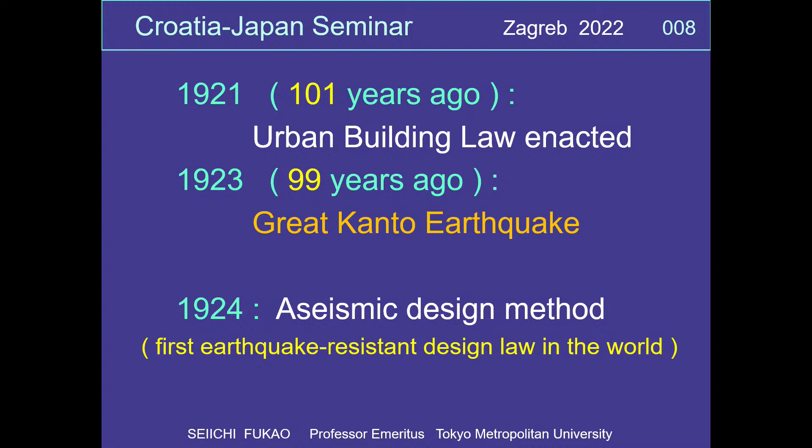In those days, the building height was restricted to 31 meters at maximum. I assume people worried about the risk of earthquakes and fire on high-rise buildings. As a matter of fact, the 5-storied pagoda of Toji Temple, built in 1644, is 54.8 meters tall and still standing solid. Wooden structures are pretty strong against earthquakes.

This 31-meter height limit was in place till 1970, about 50 years ago. A major shift in the approach to structural calculations terminated the restriction. But even before 1970, skyscrapers started to show up in Japan, taking advantage of a special permit system. Today, we use different seismic design methods between buildings 60 meters or higher and lower than 60 meters.

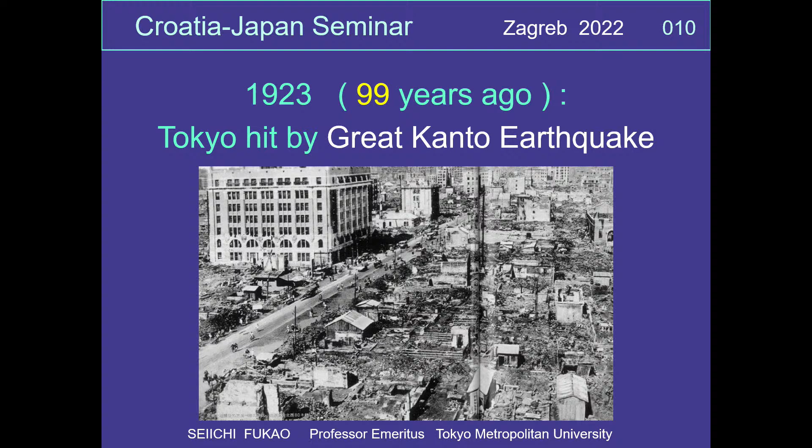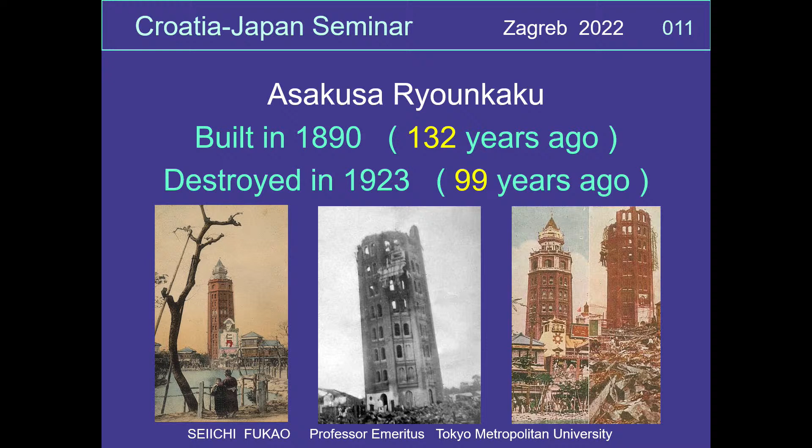The Great Kanto earthquake destroyed this building called Ryōunkaku, which had been built as a scenic viewing tower in a downtown area called Asakusa in Tokyo. It was a 12-story brick building, 52 meters tall, and completed back in 1890.

Right after the Great Kanto earthquake, an organization for recovery efforts was created called Teito Fukko-in, or Imperial Capital Reconstruction Institute, headed by Shinpei Goto. Mr. Goto had been the governor of Tokyo and was the minister of the interior at that time.

In 1924, a year after the quake, the Ministry of the Interior founded an organization called Dojunkai, which constructed multi-residential buildings from 1925 to 1934. The construction of wooden houses continued on at the same time.

From 1925, the same year, elementary schools were reconstructed using reinforced concrete, amounting to 117 schools in total.

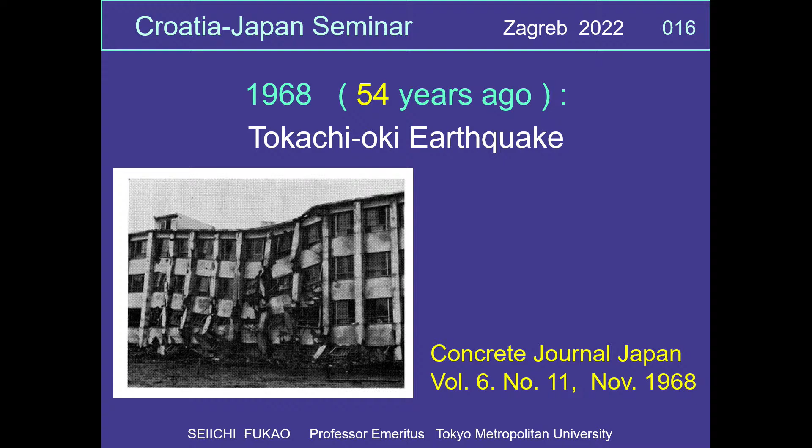In 1968, there was the Tokachi-oki earthquake of reportedly magnitude 7.9. Post and beam RC school and university buildings received significant damage in southern Hokkaido and the Tohoku regions. It sent a shockwave through the discipline of structural engineering and initiated a broad range of new studies.

In 1971, the Enforcement Order of the Building Standard Act was amended. Enforcement orders belong to their governing laws, and the order prescribes special design methods and other requirements under the BSA, Building Standard Act. In addition, the Architectural Institute of Japan, or AIJ, revised its RC structural calculation standard. The AIJ is an organization of Japanese researchers in architecture with approximately 36,000 members, including structural engineers, designers, and architects.

Our seismic design methods and seismic resistance standards have evolved thanks to our experience of earthquakes and their impact, scientific and engineering studies, and actual construction. Buildings do last for a long time, and the vulnerability of old buildings constructed under outdated building codes became a matter of concern. Thus, in 1977, the standard for seismic evaluation of existing buildings and guidelines was introduced.

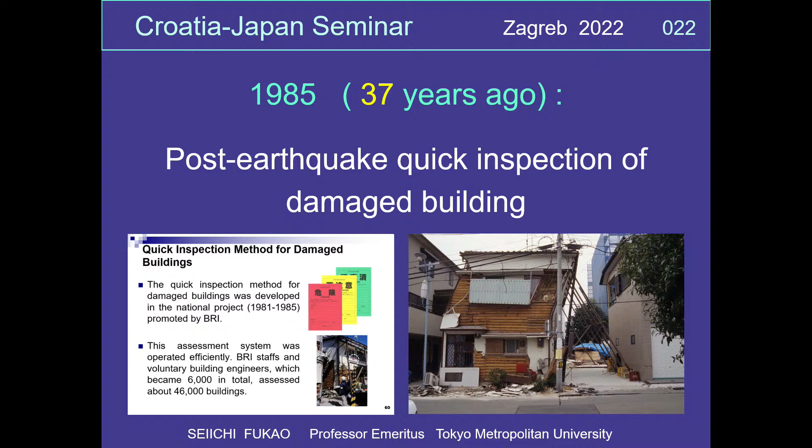In 1985, the Building Research Institute, under the Ministry of Construction, led the development of the post-earthquake quick inspection of damaged buildings, a new technology and program where buildings are surveyed for damage right after an earthquake. Assessment is made of whether the building is damaged to the extent it is hazardous and should be off-limits, or if it is safe even if showing some visible damage, and the building will be marked accordingly.

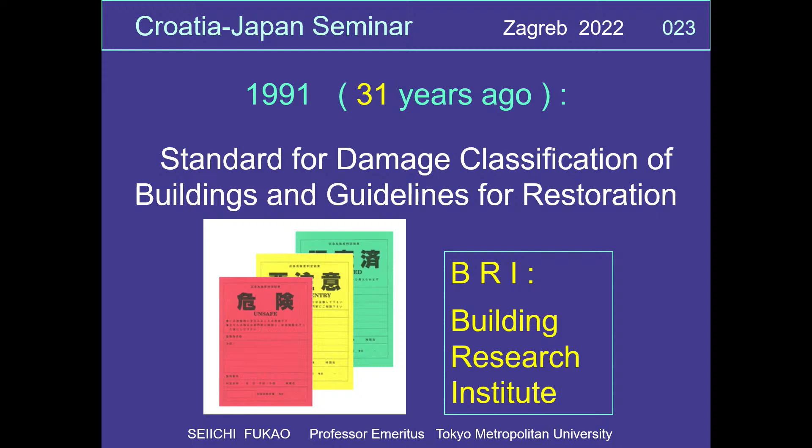In 1991, the standard for damage classification of buildings and guidelines for restoration was implemented. Don't you agree that the color coding of yellow, red, and green is very easy to understand? These stickers will be placed on buildings.

In 1995, a magnitude 7.2 earthquake hit South Hyogo, including the city of Kobe. It was a modern-day seismic event, physically and figuratively, striking a densely built-up metropolis which shocked the nation. Infrastructure and civil engineered structures were directly hit. More than 6,000 people lost their lives. It was tragic to witness fires consuming areas crowded with wooden houses. It has been already 27 years since then.

Damage was mostly found among buildings constructed before the new seismic code of 1981, and those built after the law were left relatively intact. For detached residential houses, more than 400,000 units received substantial damage, including 100,000 totally collapsed, 100,000 semi-collapsed, and the rest partial damage. Nearly 5,000 residential or multiple residential buildings received damage as well.

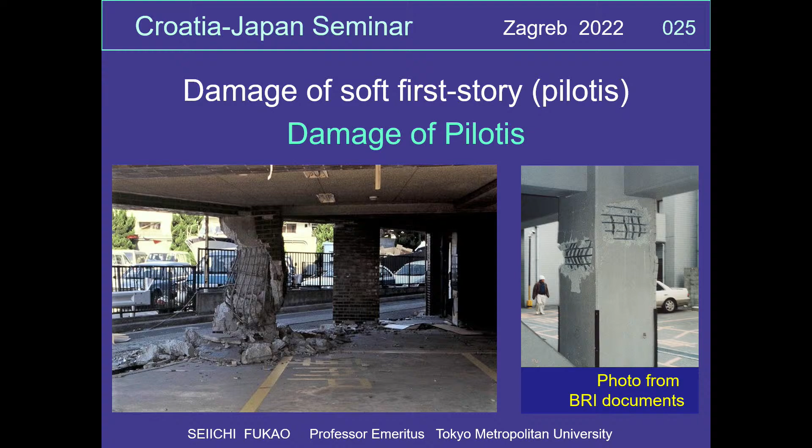This earthquake was noted for its effect on piloti architecture. Its columns of reinforced concrete failed under the load from the superstructure during the ground motion. Here in Zagreb, I saw a building with a piloti, which looked similar to Unité d'Habitation by Le Corbusier, making me worry a bit.

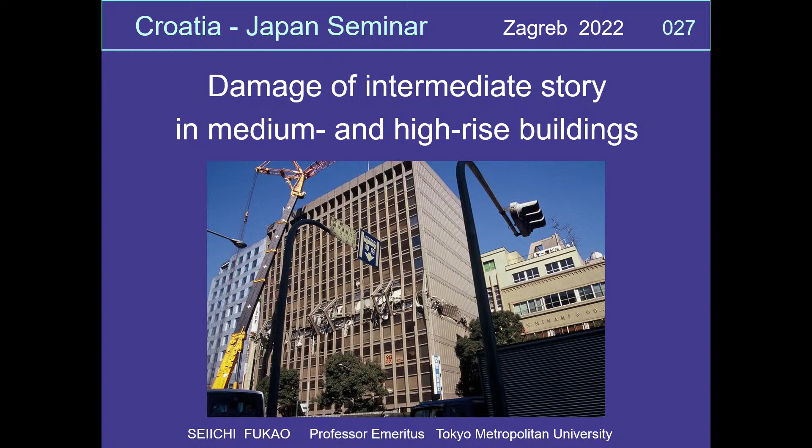This lower building of the Kobe City Hall is now used again by removing the failed upper stories, as shown in the picture. This shows another example of the failure in intermediate stories.

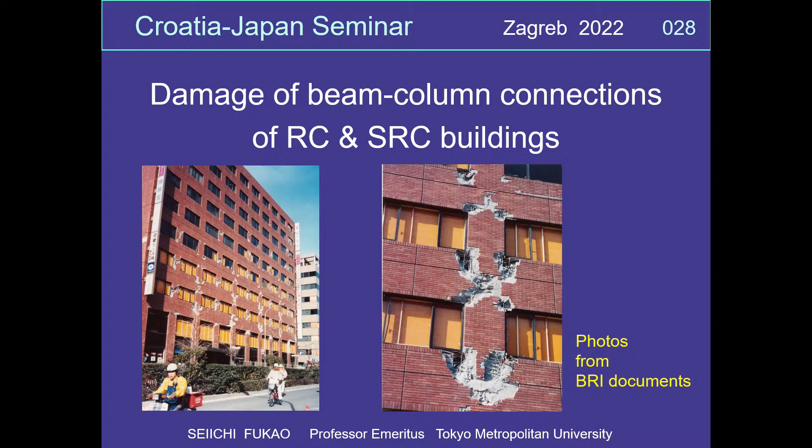Also readily observed was damage to column and beam connections in reinforced concrete buildings. This had been recognized as a big problem for some time, and many researchers in structural engineering in Japan are working on this challenge. It is especially prevalent among so-called short columns, a type of design where columns are shortened due to the presence of a jack wall or the like.

Recently, a slit or cut is placed between a jack wall and its short columns to address this. Until this earthquake, connections in reinforced concrete construction were typically made by gas pressure welding of rebars. Some connections were torn apart by tensile force.

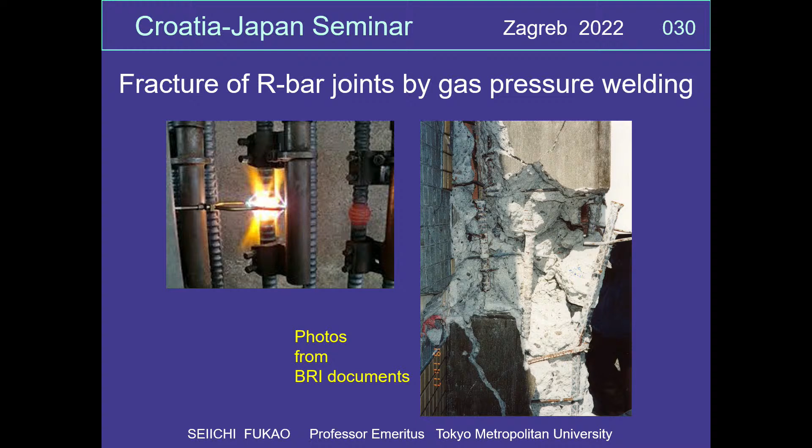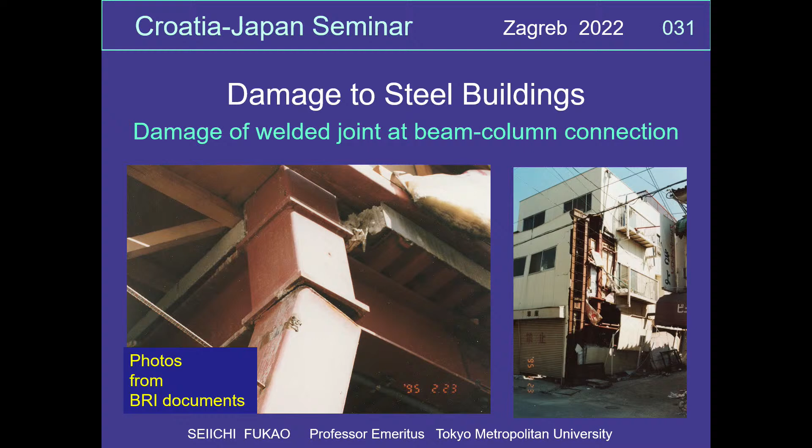Steel construction also received different types of damage. Both design and construction issues were possible causes.

The Ashiyahama High-Rise Residential Project is a multi-residential complex built around 1978 as a national project. We saw column failures by tensile stress, causing the building to tilt significantly. The project featured an innovative design where a mid-rise multiple residential building of bearing wall construction, using precast concrete panels, is placed within a steel superstructure. It also featured a sophisticated use of steel members without fire encapsulation, which allowed us to discover severed columns like this after the earthquake.

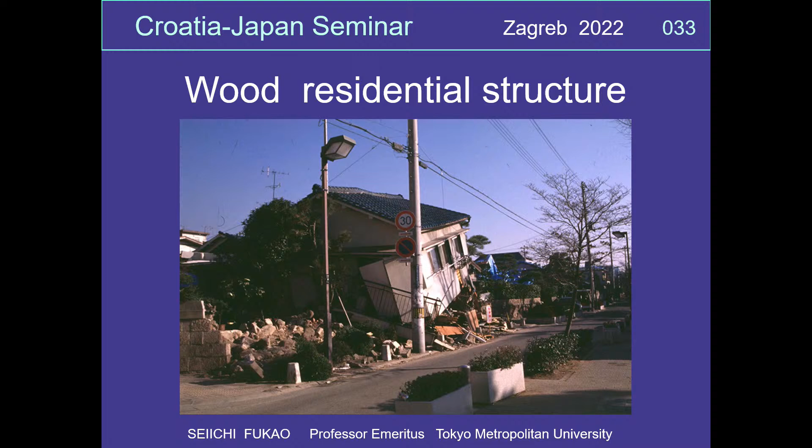Wooden houses were also very much affected. The study for damage classification of buildings had been conducted from 1981 to 1985, and it was actually applied in the field this time. In 2000, the Building Standard Act was revised with more performance-based provisions.

This was a game changer in the sense that different structure types are now assessed against the same criteria, a departure from the old system of type-specific regulations. My personal view on this is that not enough has been done yet, in my opinion.

In 2005, a 3D destructive vibration test facility called E-Defense was completed, which can actually shake full-scale structures. E-Defense is a facility where you can test full-scale structures and gain knowledge by observing the actual process leading to failure with your own eyes. I believe Ms. Yamazaki will describe it in detail to you.

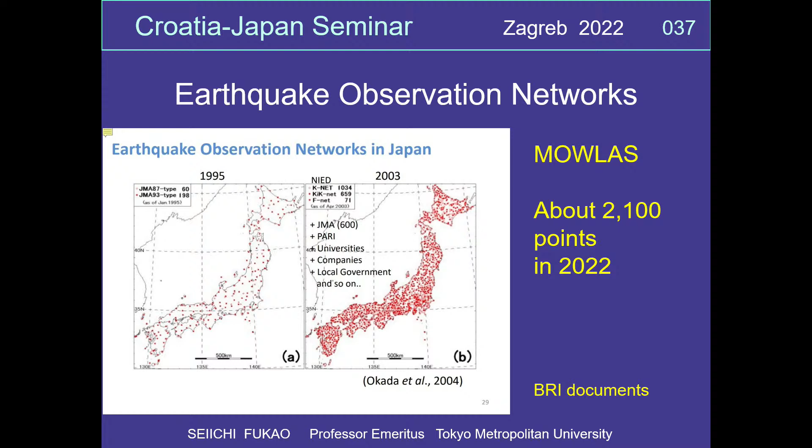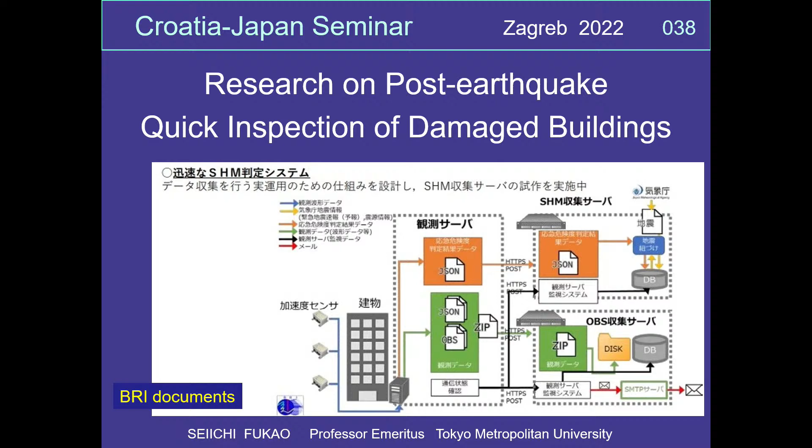Research on damage classification continues today. Utilization of new technologies such as satellite imaging or drones is ongoing, and the development of analytical methods for data collected by such new technologies is ongoing as well.

I am happy to report renewed interest in the seismic performance of Japanese traditional wooden construction. Five-story pagodas have been built in wood from ancient times in Japan, but there is no record of their failing in an earthquake. Why? That is what we are studying now, actually by using the structure.

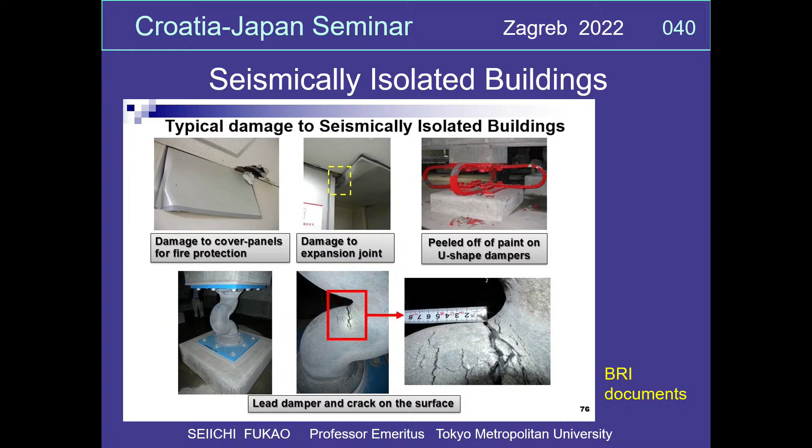We are also seeing an increasing number of buildings using seismic isolation systems, which use rubber absorbers as supports. Their adoption is spreading rapidly among government buildings and medical facilities, which need to remain functional even during earthquake events.

In addition, existing buildings are being seismically upgraded by incorporating earthquake isolation systems, which we call retrofitting. The Osaka Central Public Hall is a hybrid building of steel and brick masonry constructed in 1918, over 100 years ago. We actually lifted the building and installed seismic isolation systems.

Then came March 2011 and the East Japan Great Earthquake. I am pretty sure you are all familiar with it. It was a magnitude 9.0 oceanic megathrust earthquake.

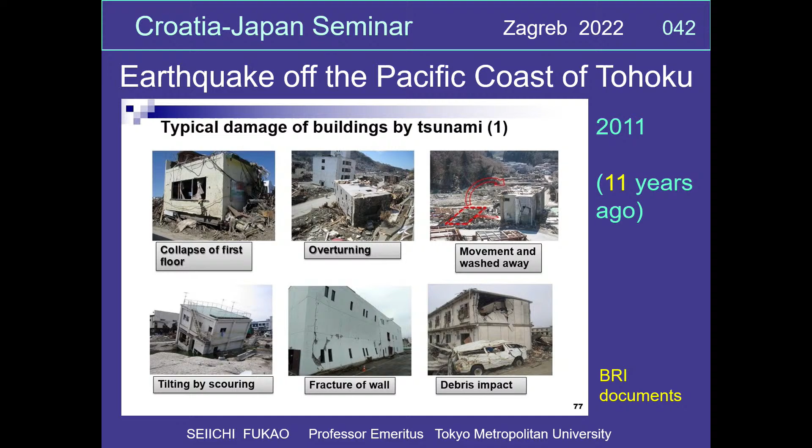11 years have passed since then. It was a submarine megaquake reportedly of magnitude 9.0. The news of catastrophic losses from the tsunami flew through the world. Even more shocking was the news of the Fukushima nuclear plant going out of control due to the tsunami.

The East Japan Great Earthquake caused little damage to reinforced concrete buildings. I would say there wasn't much of a problem with the seismic strength of buildings itself.

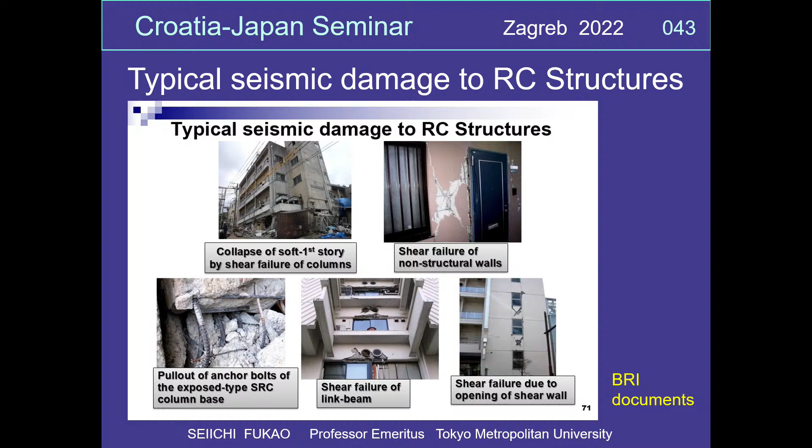Steel buildings did receive some damage, but nothing significant from the ground motion. However, when they were hit by the tsunami, they could not withstand the seawater pressure.

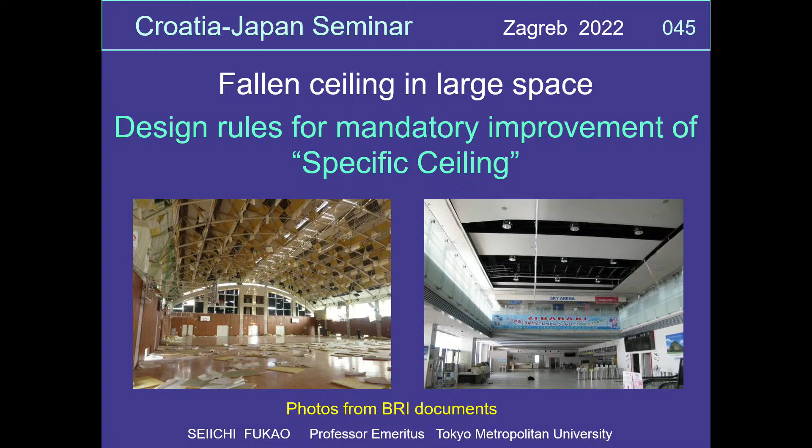The failure of non-structural members was highlighted by this earthquake. In particular, large pieces of ceiling finishes fell off in long-spanned spaces. It was later mandated that ceilings of a certain size or larger be specially designed, which are now defined as specific ceilings.

This East Japan Great Earthquake actually rocked skyscrapers in Osaka City, 700 kilometers away from the epicenter. These buildings swayed slowly for a prolonged period of time. The buildings did not collapse, but this rocking was identified as a major issue. Studies of such long period seismic motions are now ongoing.

6 years ago, in 2016, the city of Kumamoto on Kyushu Island in western Japan was hit by the Kumamoto earthquake. It was unique in that there were two shock waves, and the second one was greater than the first. Houses were extensively damaged, and so were buildings designed to the old seismic code.

This is stage 2. Mr. Hama will explain this in detail later.

Then, a reconstruction plan must be made, which should take place at around 3 months, though it took 6 months to make a reconstruction plan after the Great Hanshin-Awaji earthquake disaster, as it was a massive disaster. This is stage 3. The full-scale reconstruction period is called stage 4, and the period immediately before the occurrence of a disaster is called stage 0, or the disaster prevention period.

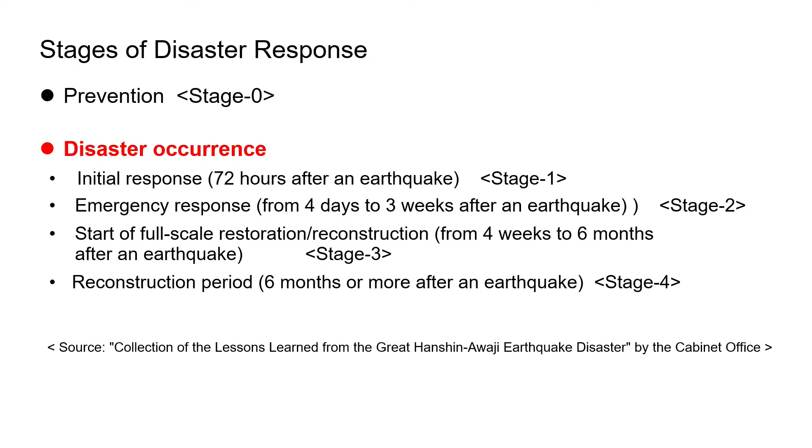Next is the legal system for disaster response. Now I will explain the legal system in Japan concerning response to disasters. I will go through them in chronological order.

First, the Disaster Relief Act was enacted in 1947. This act was made to ensure victims are protected after a disaster event, but it did not cover post-disaster reconstruction, which means this act was only for stage 1 and stage 2. Also, the act stated that prefectural governors were principally responsible for providing relief to victims. This is still the basic approach today.

The types of relief are defined here, and provision of shelters and emergency temporary housing is stated in the first item, and emergency repair of affected houses is in the 6th.

Then, the Basic Act on Disaster Management was enacted in 1961. I believe it would be ideal to have a Master Act first, and then various laws relating to each policy to follow. However, this does not always occur in Japan.

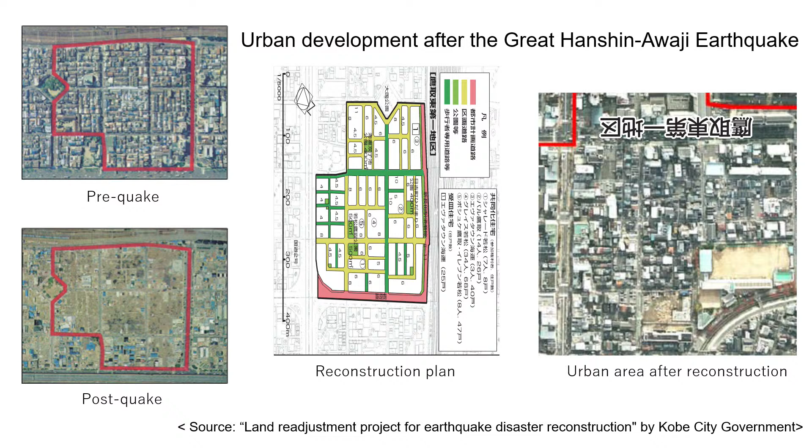We already had, and still have, a law that makes it possible to restrict rebuilding, including restoration, in the disaster-stricken urban areas for 2 months. However, 2 months was too short to prepare a reconstruction plan and obtain consensus of the residents. Therefore, a new act was enacted to extend the period of this building restriction to 2 years for the areas subject to planned reconstruction.

The Act was enacted in 1998, which grants financial support to disaster victims. Before this Act was created, no subsidies were available for repair or restoration of houses. This was based on the principle that restoration or reconstruction of personal property should be made through self-help efforts, and that it would not be appropriate to spend public funds for that.

However, the Great Hanshin earthquake caused so much damage to housing, and there were a great many victims who were unable to reconstruct their houses on their own. That led to the creation of this new act.

Under this act, those whose homes are totally destroyed are granted 3 million yen, around 22,000 euro, when they build or purchase a new house. However, this financial support is less than 1/10 of the amount required, as the average cost of constructing a detached house in Japan is around 35 million yen, or around 259,000 euros. Most of the disaster victims have rebuilt their homes through self-help efforts, such as taking out loans.

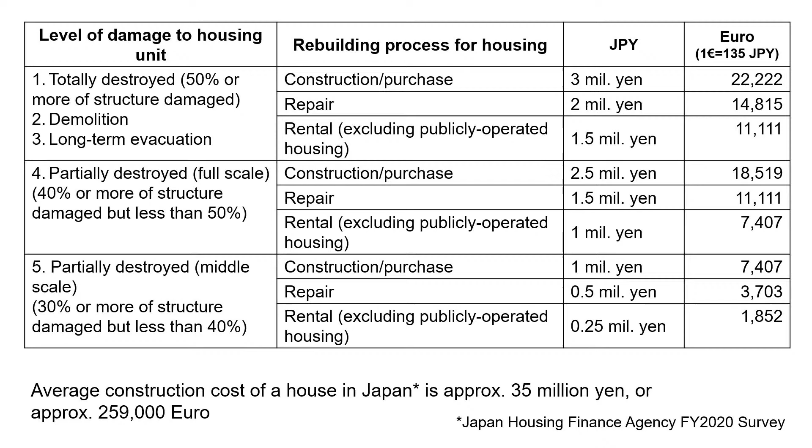Then the Great East Japan earthquake hit in 2011. This historical disaster led to the introduction of another act. This new law provides for the division of roles between the national government and local governments related to post-disaster reconstruction.

As explained in the beginning, prefectural governors are principally responsible for providing relief to disaster victims in Japan. For reconstruction of urban areas and housing, both prefectures and municipal governments are involved. With this act, when a large-scale disaster occurs, the national government can make a basic policy for reconstruction and provide urban planning on behalf of the affected prefectures. The law also provides for the national government to restore infrastructure such as roads instead of the prefectures.

There were 3 disasters to which this act was applied since 2013: an earthquake, a typhoon, and the flooding due to heavy rain.

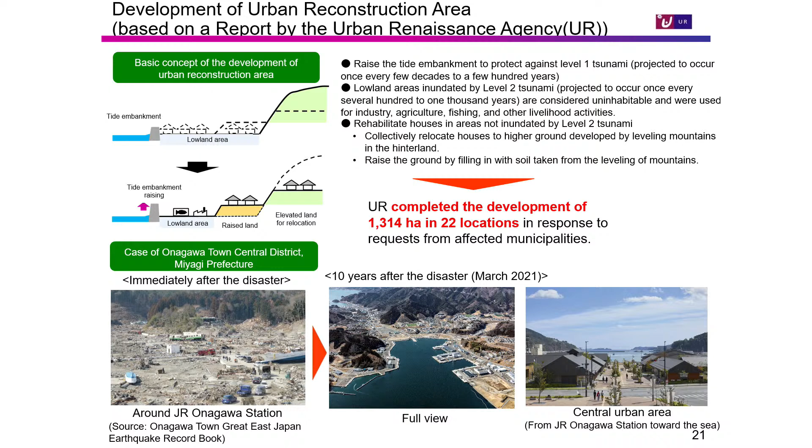The UR completed the development of 1,314 hectares in 22 locations in response to requests from disaster-struck municipalities.

Although the cost of reconstruction or repair of private houses are, in principle, borne by individuals, publicly operated housing for disaster victims is offered as rentals to those who can't afford to rebuild their own homes. The rent depends on the income of the tenant family. The Urban Renaissance Agency has also constructed such housing on behalf of disaster-struck municipalities upon their request.

In general, when individuals reconstruct their own houses, they are eligible for financing by a government agency. The Japan Housing Finance Agency, a financial institution established by the government which provides financing for housing construction, offers loans at low interest rates, with more favorable terms available to disaster victims. However, a loan is still just that, a loan. In some cases, builders and housing companies cooperate together to support owners to reconstruct their houses.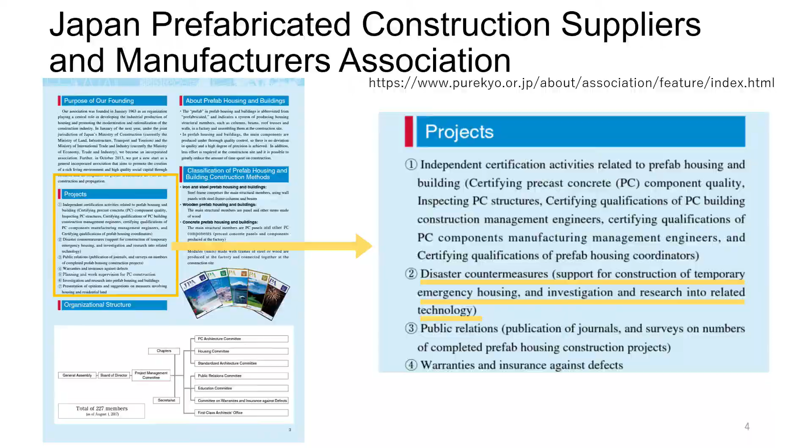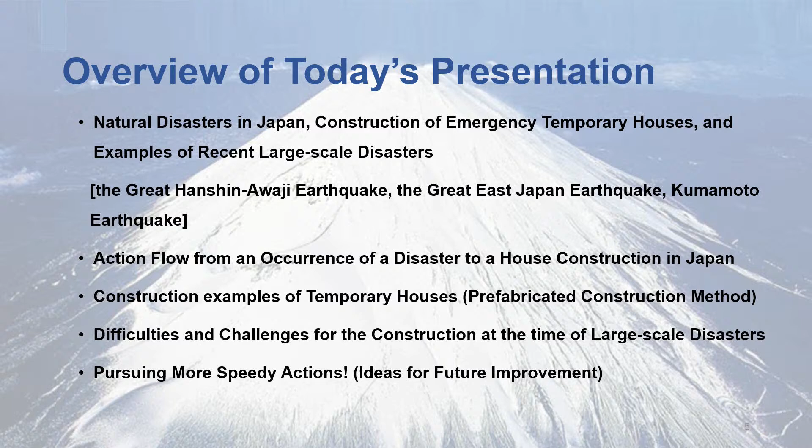This is the outline of my presentation. The first topic is recent examples of natural disasters in Japan. Dr. Fukao pointed out three recent major earthquakes.

Japan is prone to earthquakes because of geological conditions, as we have multiple plates meeting together. In recent years, climate change has also become a major factor in natural disasters, especially heavy rain causing floods.

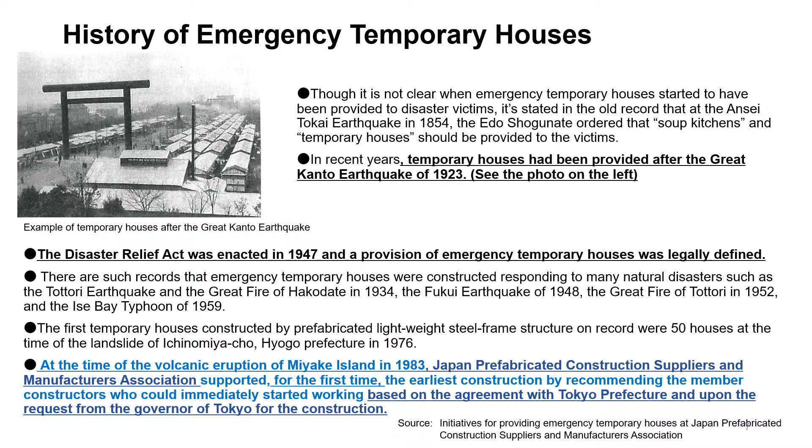I'd like to focus on temporary housing. Back in 1923, when the Great Kanto earthquake occurred, there was already provision of temporary housing. In 1947, we had formalized provision of temporary relief housing thanks to the Disaster Relief Act. In 1983, the association built its first prefabricated relief housing at the request of the Tokyo governor.

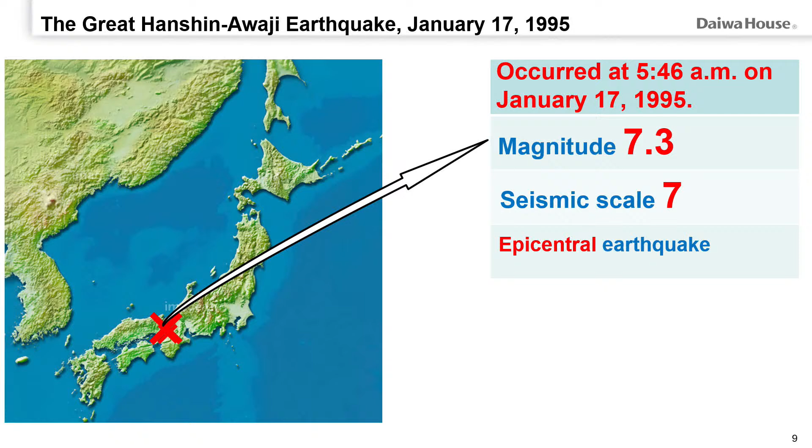On January 17th, 1995, there was an earthquake of magnitude 7.3, called the Hanshin-Awaji Great Earthquake, which directly hit the city of Kobe.

The disaster produced a death toll of 6,434 people, and of that number, 5,800 people lost their lives because they were crushed to death by their buildings. Those who fled their homes and evacuated numbered 367,000 people, and 250,000 houses were lost.

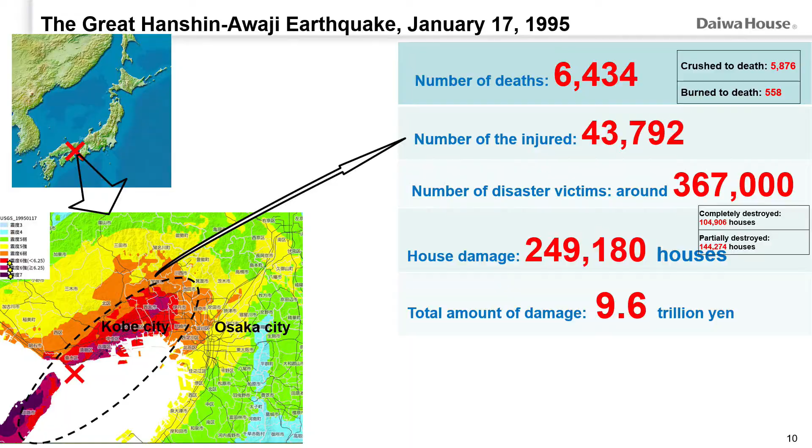I was living around here at the time, and fortunately my house was unscathed, and I made it to my office. Once the sun rose, we started learning about collapsed highways, pushed-over buildings, and flattened houses.

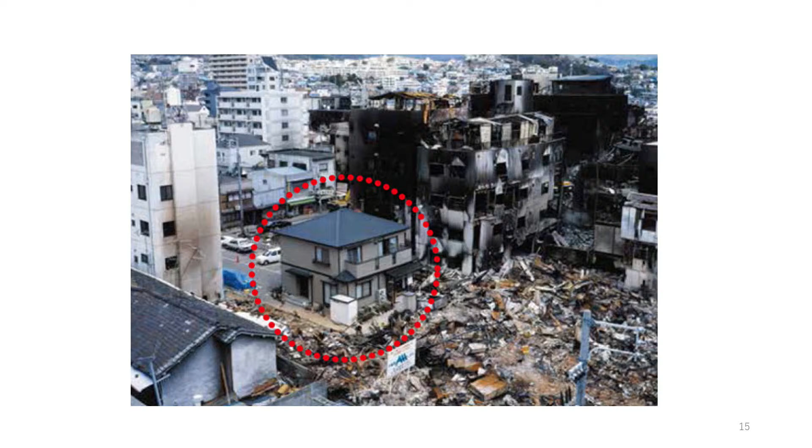This picture shows the contrasting condition of houses built under the new seismic code versus houses flattened because they were built to the old code. This next picture shows the same thing.

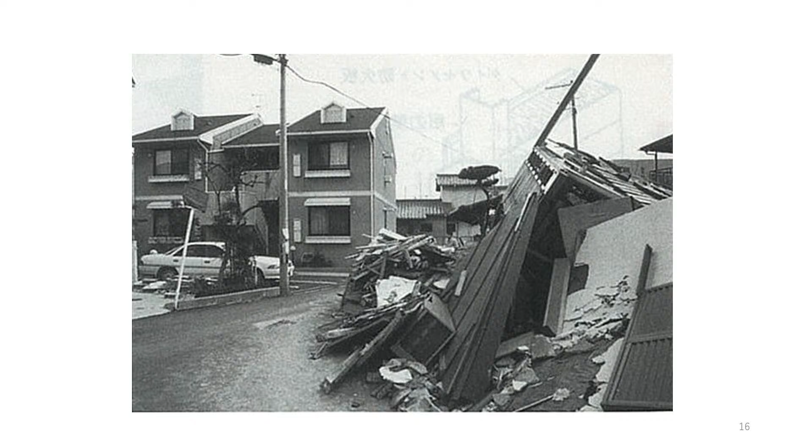In 2011, we had the Great East Japan Earthquake. It wasn't only the earthquake itself, but the tsunami that hit the area, completely destroying some cityscapes, with entire municipalities wiped out. We saw images of the tsunami washing away everything in sight, and it was a shocking sight to everyone in Japan.

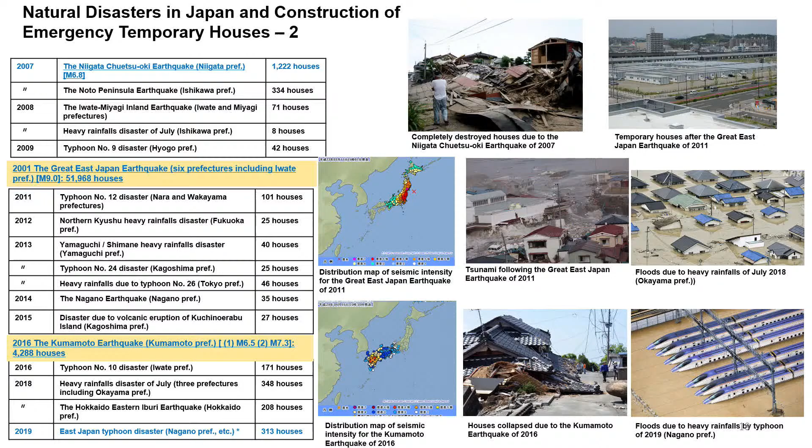The earthquake was magnitude 9.0, and the tsunami reached as high as 10 meters in height. More than 15,000 people lost their lives, most of them due to the tsunami - they were drowned.

The number of people who needed evacuation reached 575,000, and over 400,000 buildings were damaged.

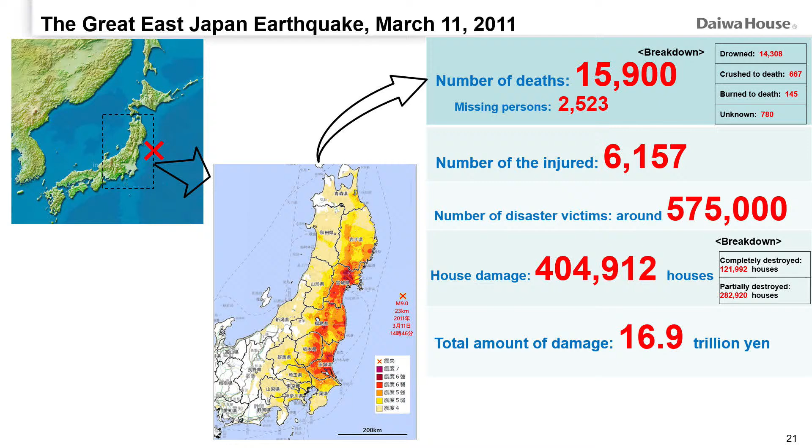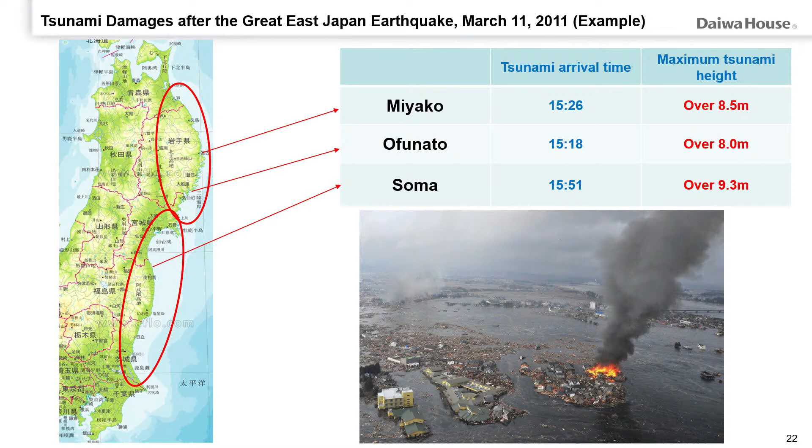The tsunami hit this coastal area, stretching about 540 kilometers along the shoreline. That's about the same distance as between Zagreb and Dubrovnik.

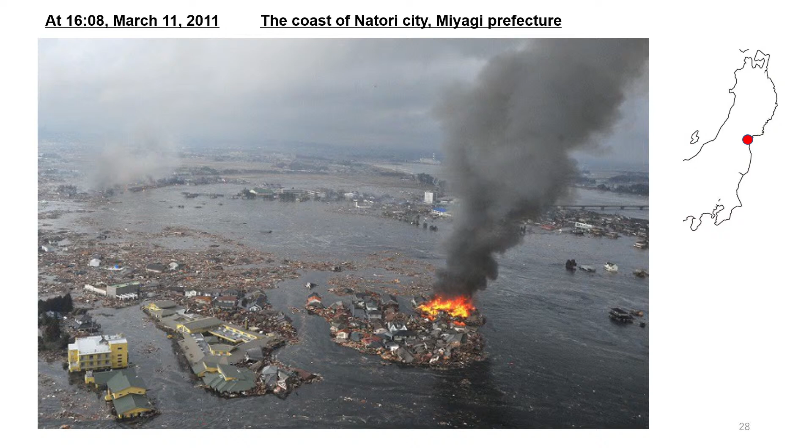This is footage of the tsunami. Children were saved by taking refuge on the rooftop of an elementary school building.

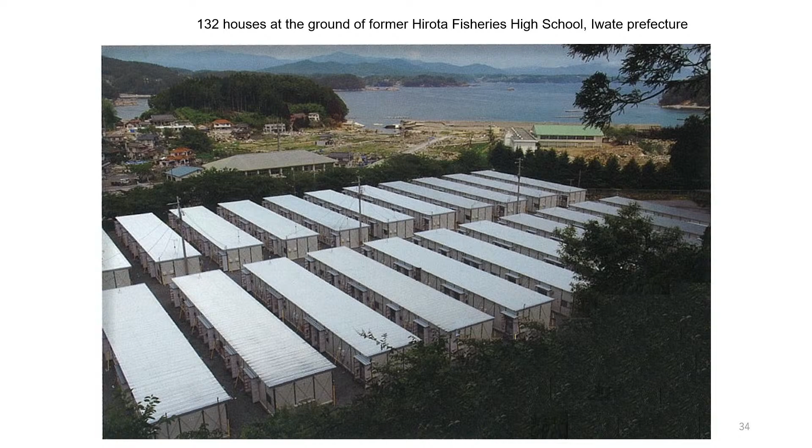Because of this devastated condition, we needed to build relief housing as soon as possible.

This is about the Kumamoto earthquake that Dr. Fukao touched on before. It's unique because there were two shocks: the first was magnitude 6.5, and 28 hours later came what we call the main shock, at magnitude 7.3.

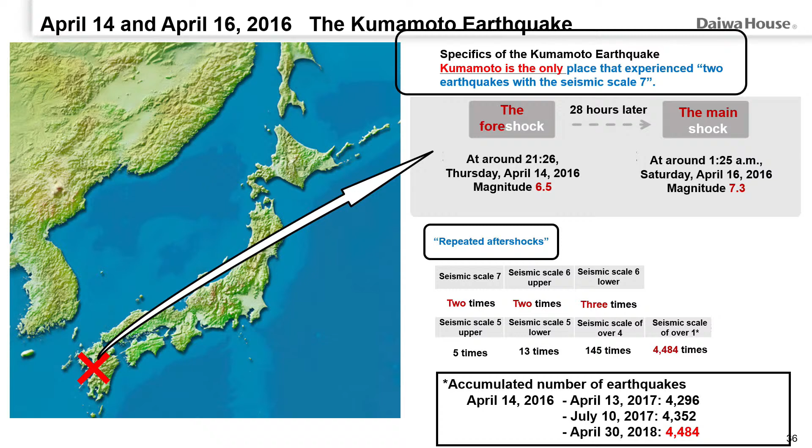A characteristic feature was the large number of aftershocks afterward. To ensure the safety of rescuers and reconstruction workers, the initial rescue and recovery work was delayed.

In this earthquake, the death toll was 50, but the number of victims was 187,000. This is a provincial city, so for this type of city, the ratio of victims is quite high.

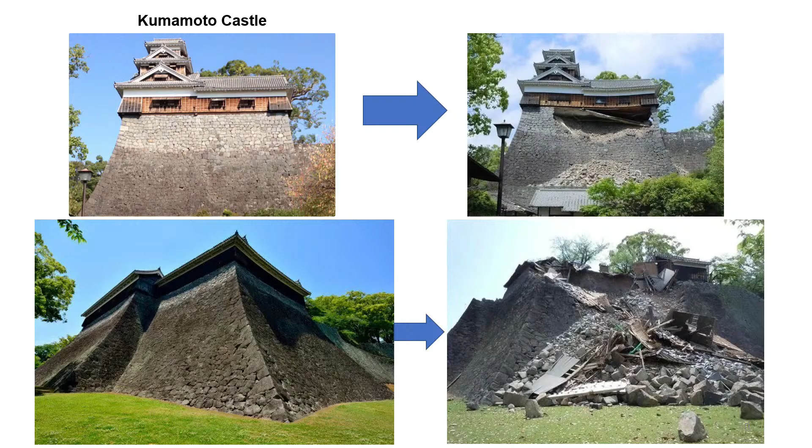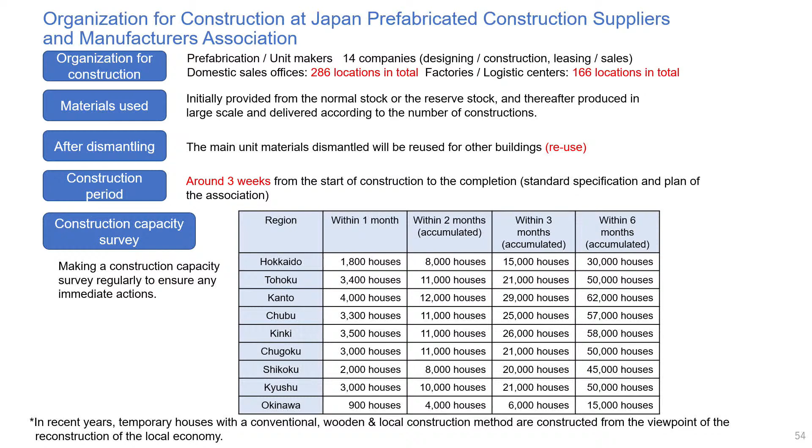Regarding the specifications for this emergency housing, we have three parameters: it must be low cost, have a short construction period, and be able to be supplied in mass quantities. So the specification is kept very simple.

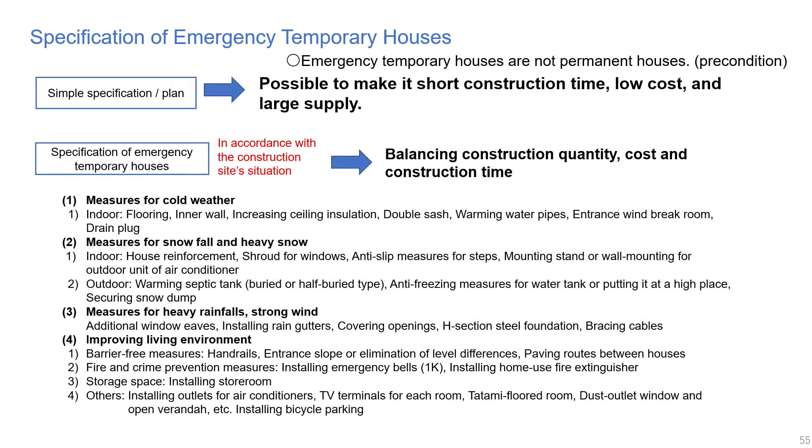We also have a barrier-free design for wheelchair users, community meeting space, and welfare-type temporary housing plans for the elderly or those requiring care.

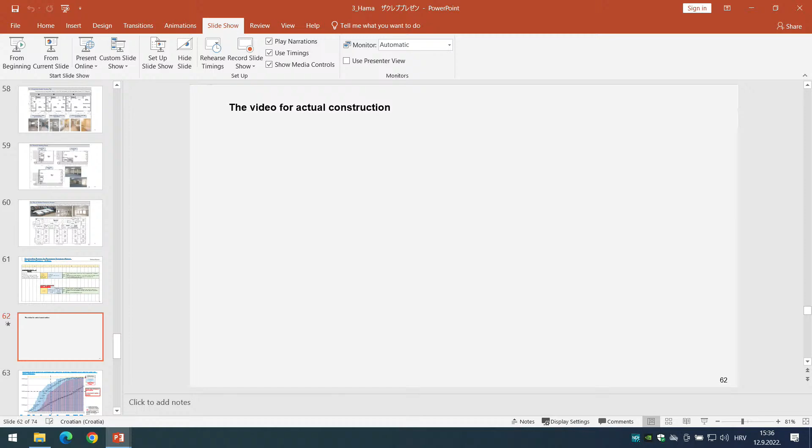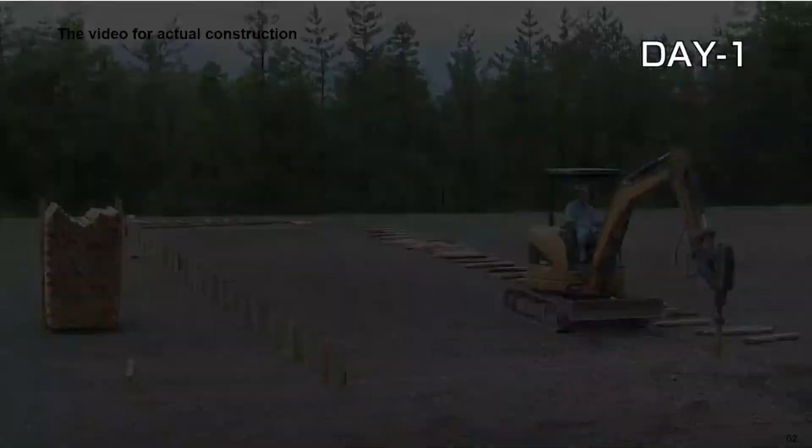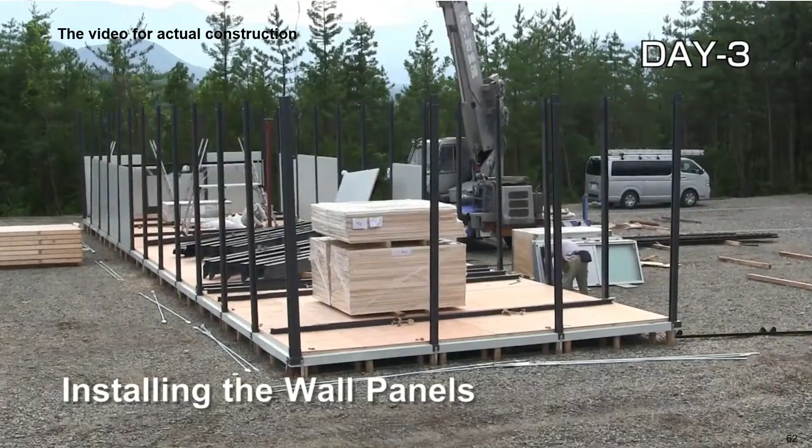This is the first day, pile foundation is laid out. Steel posts are placed. Now the exterior panels are installed.

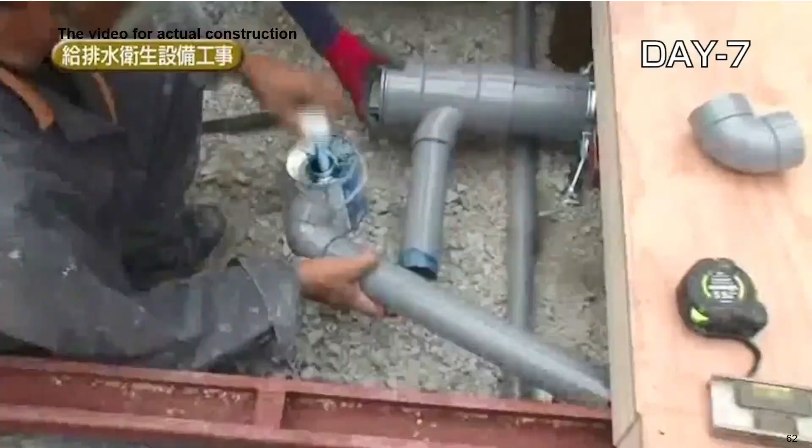The roof is on by the fifth day. From day 6, mechanicals and interior work starts. Partition walls and equipment go in, then landscaping is done and the building is completed.

For the East Japan great earthquake, the government requested us to provide 30,000 units of housing within 3 months. We actually achieved that in June of that year.

I'm pretty sure you share with me that there are issues and challenges in recovery work. The greater the disaster, the later the initial action can take place, because if the disaster is so large, it's very difficult to get into the area from outside. The local government people are themselves victims, and they don't really have time to plan for recovery because they need to attend to the issues in front of them.

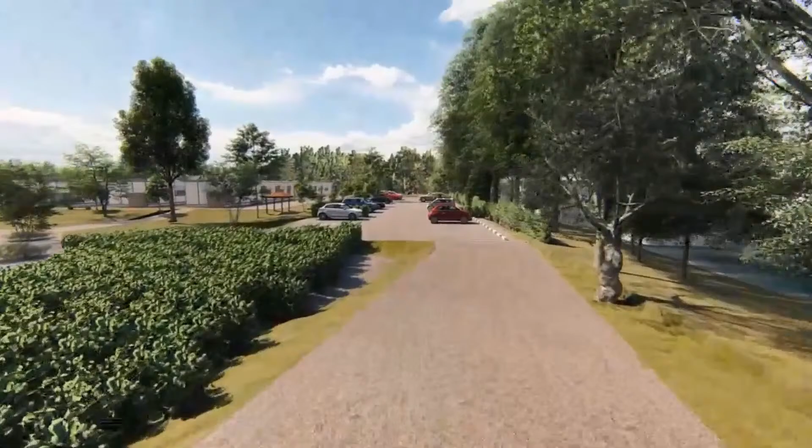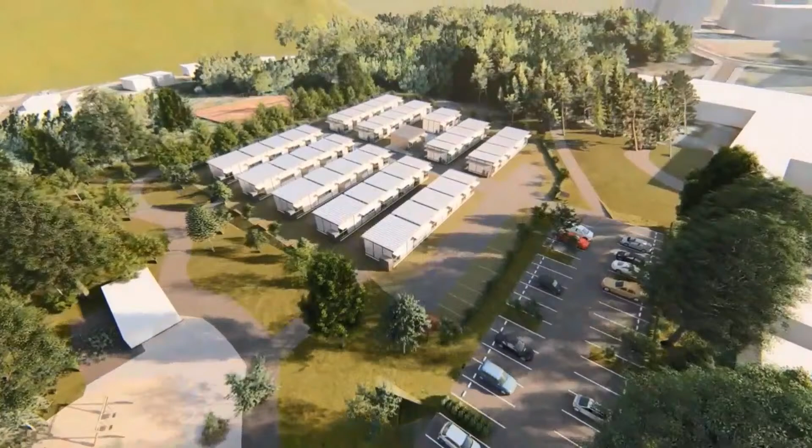The spacing between buildings was planned with more room based on residents' requests, and we shared the image using a 3D model. At the request of prospective residents, we prepared 3D images of the completed project, and we believe that helped get consent from future residents for the plan.

Smooth mutual understanding between us, the construction party, and the local government officials preparing the site meant the work that used to take 7 days was completed in 2 days, which we are very glad about. We want to continue working to resolve any outstanding issues.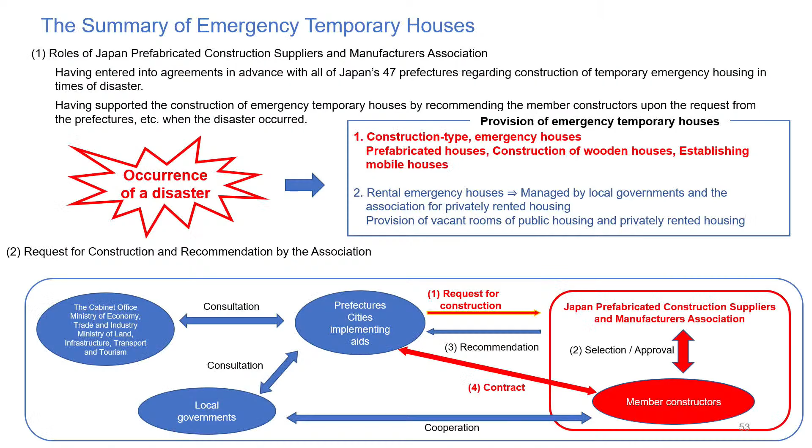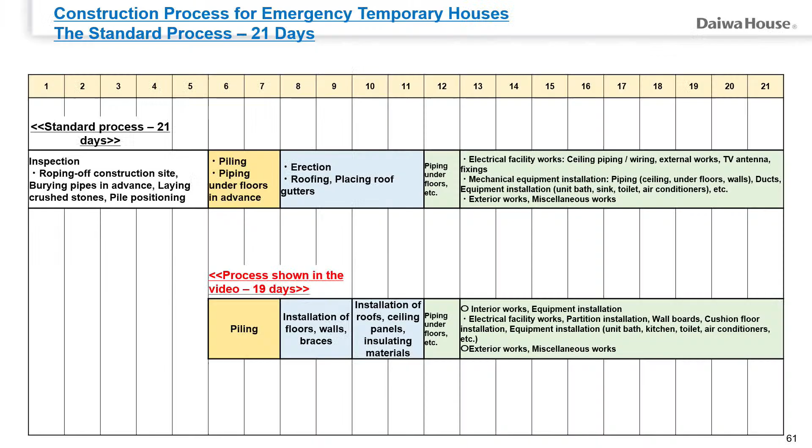For the first question, from this situation, families can have their own room, and from there they can rebuild their destroyed homes or go to work, so I think everyone is very grateful and feels secure living there. They start in temporary housing where they can have privacy with their own families, then commute to work or go check on their own home. I feel the inhabitants feel comfortable, or at least secure, in the housing we provide.

For the second question, since these are prefabricated buildings, usable steel frames and panels are reused. Once dismantled, steel columns and other reusable members are used again for other buildings.

Just a short question. You presented the prefabricated family houses. Do you produce prefabricated schools or other types of buildings?

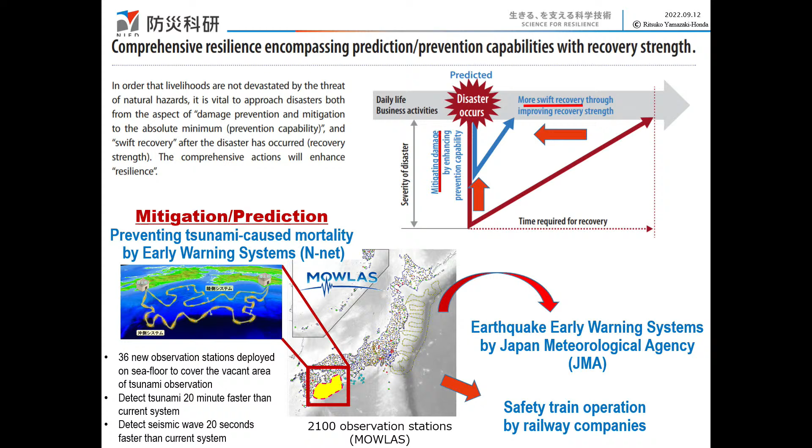Another example is swift recovery: the shared information platform for disaster management, which we call SIP4D. As is often the case, even if disaster data are collected on site, such data cannot be shared or integrated for response actions due to restrictions or administrative boundaries, which hinders prompt action.

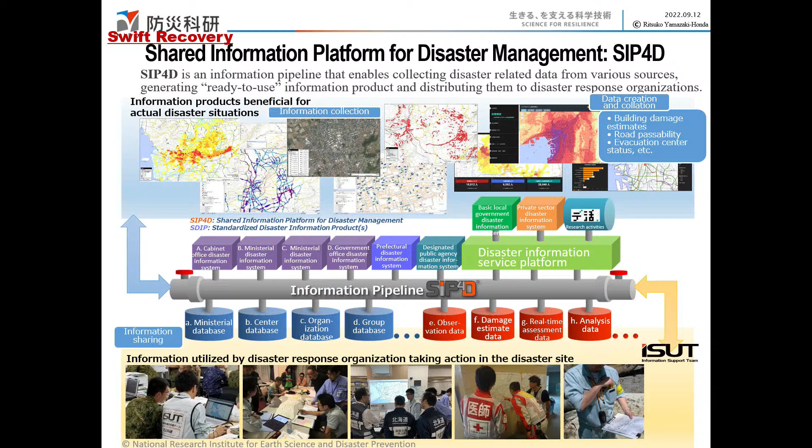Another example is for prevention: evaluation of disaster risk. How can we implement this? This diagram shows the case of landslides. In cyberspace, we can do simulation; in the physical space, we have real site experiments and model tests at experiment facilities.

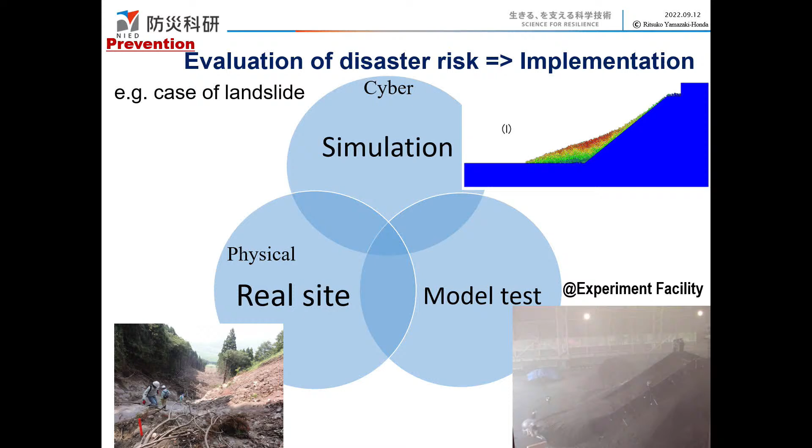Now I'm going to introduce two experiments at NIED. As Professor Fukao introduced, there is a 3D shake table called E-Defense, built after the 1995 Great Hanshin earthquake, magnitude 7.3, which caused more than 6,000 casualties. This 3D shake table can reproduce earthquake ground motion in three dimensions.

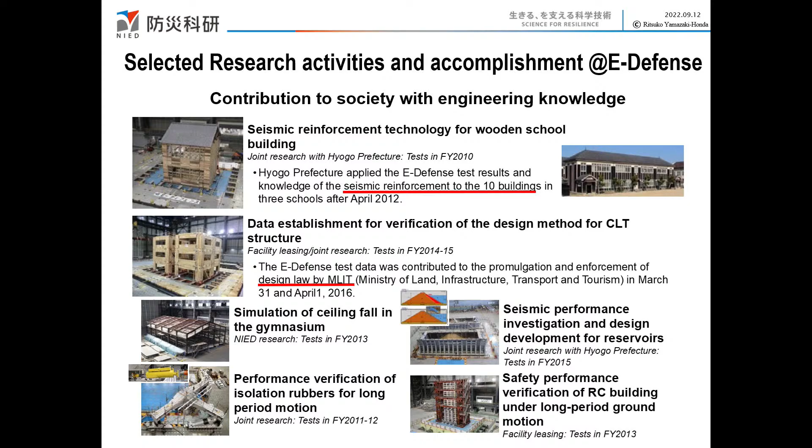These are selected research activities as accomplishments at E-Defense. Due to limited time, I cannot go into detail, but from this experiment we did seismic reinforcement for a couple of buildings, and also supported the law by MLIT.

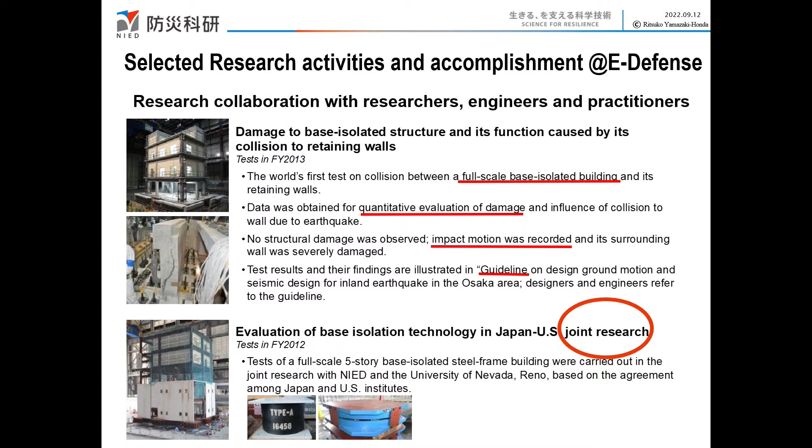Another example is research collaboration with engineers, practitioners, and researchers. As you can see, these are full scale and model tests, and the first test was done for a full scale base isolated building like here. This is a joint research project, so if engineers would like to work with us, please let us know and we could do some joint research if our interests are met.

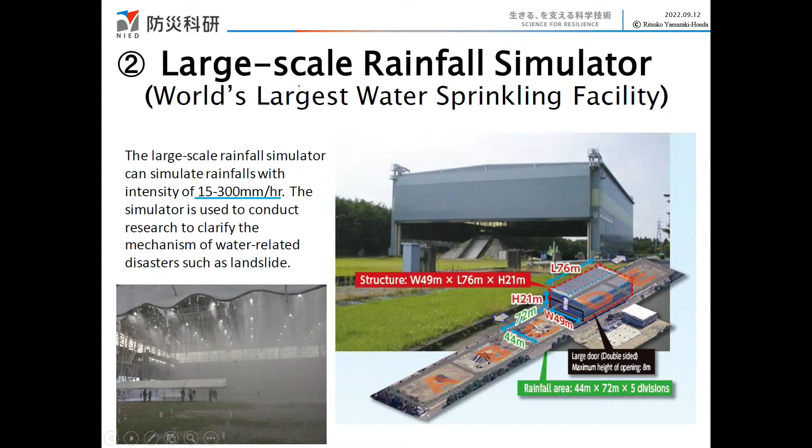The second example, our facility called the large-scale rainfall simulator, the world's largest water sprinkling facility. This facility can give you an intensity of 15 to 300 millimeters per hour. This is the highest record in Japan, but only for a limited time. We don't sustain 300 millimeters hourly, but it's really a downpour you can experience.

So how are these facilities used for social implementation? These resilient technologies with the large-scale simulator have several types of experiments, but the typical one is landslide. Nowadays we're using it for autonomous vehicles, drones, and UAVs. The results are implemented in guidelines and standardization, improving resilient technologies.

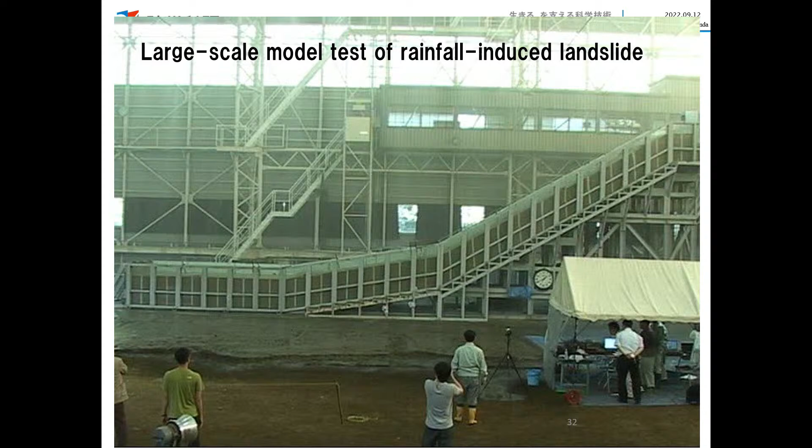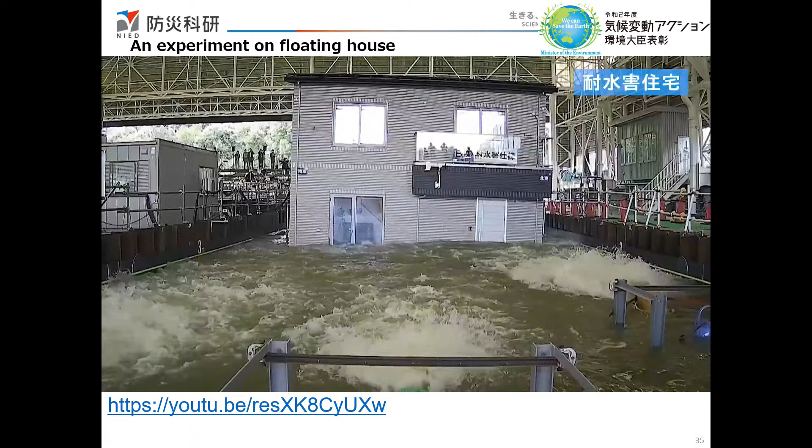As you can see, we created these types of experiments inside the simulator to study how landslides happen due to heavy rain. Another example is testing autonomous vehicles under heavy rainfall for security and safety. Another interesting example is floating houses, to study resilient new technology for housing.

The last one is priority 4: enhancing disaster preparedness for effective response and to build back better in recovery, rehabilitation, and reconstruction. As seen in previous presentations, Japan has learned from the past, reviewed problems, and improved systems. Right after disasters, we prepare for the next disasters together with the government, academics, and other stakeholders. As written in the Sendai Framework, DRR is everyone's business and essential to achieve sustainable development. The important point is how to enhance transformative capacity for everyone.